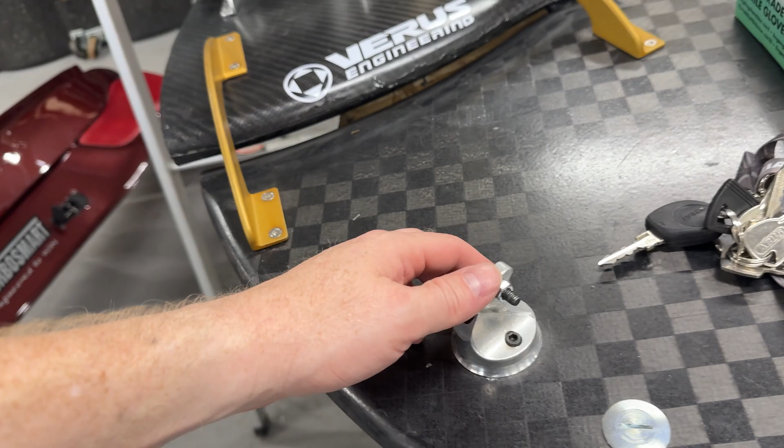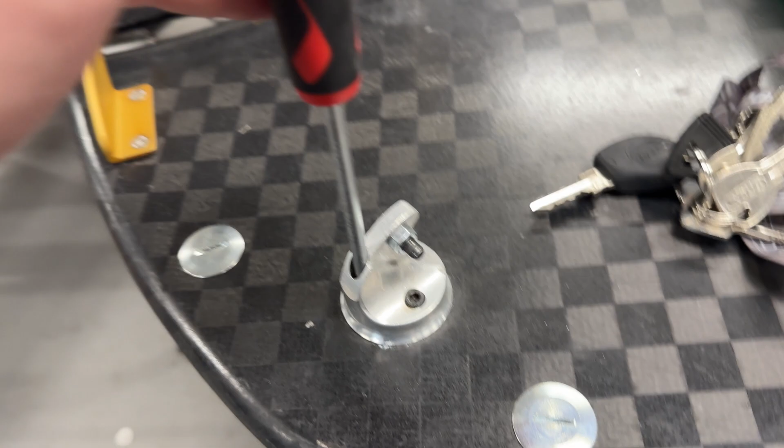And then I think also the issue is, not sure if it's visible, but if you move this one, the footprint of this unit isn't that big. I think it has a small receiver under here, which is not bigger than this diameter here. So this makes an issue, because then we literally have just this spot to support it. So whenever the load comes on this one, it tends to move like this. It's kind of difficult to show, but let me try again. So if we do this one, you can see that it moves quite a lot.

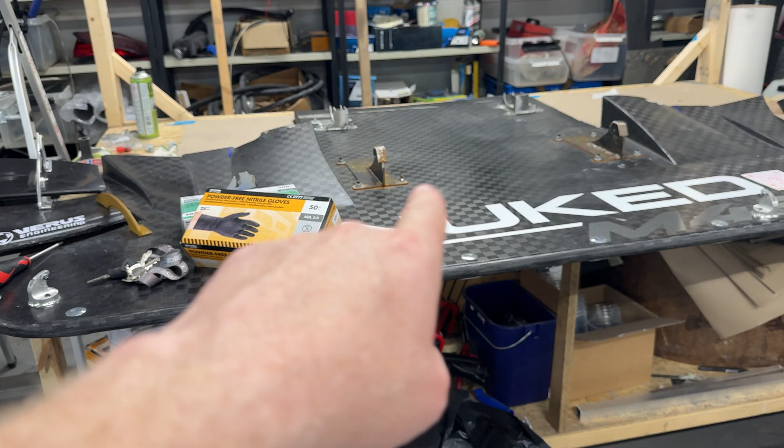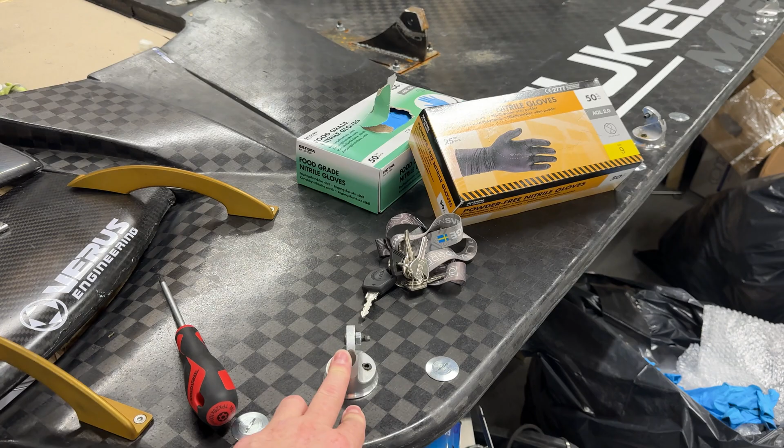So I think this might be one of the issues, but then I think this edge here is so far out from any points. Normally when people have splitters, they might have the mounting point somewhere here, but our overhang is so massive. And even from here, it's far away from any structural point. So I think what we will do, we cut the splitter open and then make a big plate inside here with supports. And then probably do something from these as well.

And then I saw that the second damage was that one of the wings here has completely separated. It has been pulled down, so it actually does its work. But these are still good. Verus made these, and these are really, really nice. But this one needs to be glued together. I think we will make new ones of these in the winter, but right now it will do. So that's the plan for that. And then let me show you the other issue.

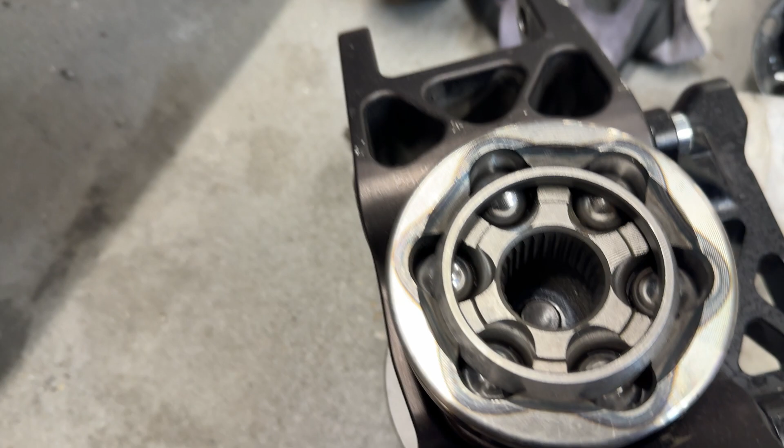So this bolt here is approximately 85 millimeters long from bottom to top. So this one is 85. I ordered new bolts, which I'm pretty sure are like 120 or 115 or 110 or something like that, but they are quite a bit longer than these. So I assembled this one now, and now you see that the thread of the bolt goes all the way through the spline shaft of the joint.

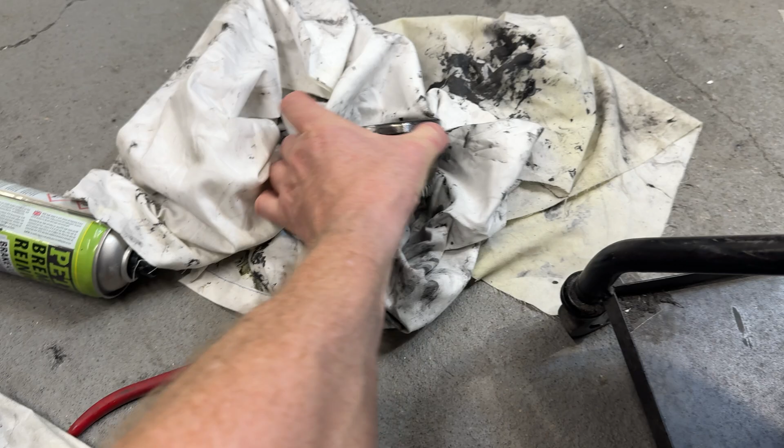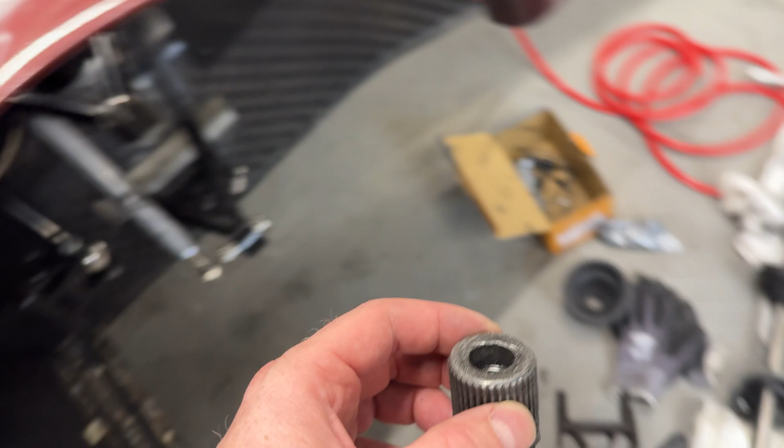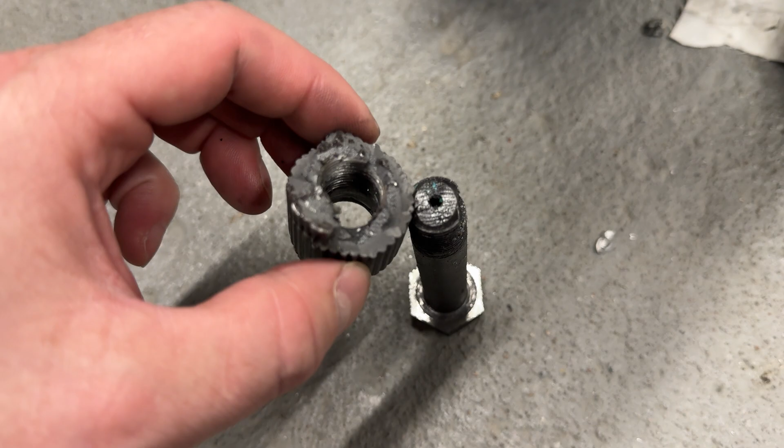So I think the issue behind this was that we had this one, dirty as hell, but you can kind of see this one. So this one actually broke here. And if you look at the other end, which I have somewhere here, this part here, when this bolt was sitting, it was literally just pointing out. So basically where it cracked, this was the top of the bolt. So to be honest, that might be the issue.

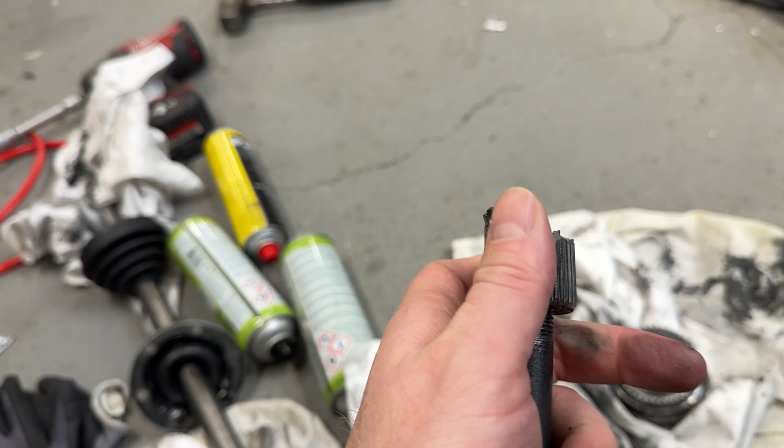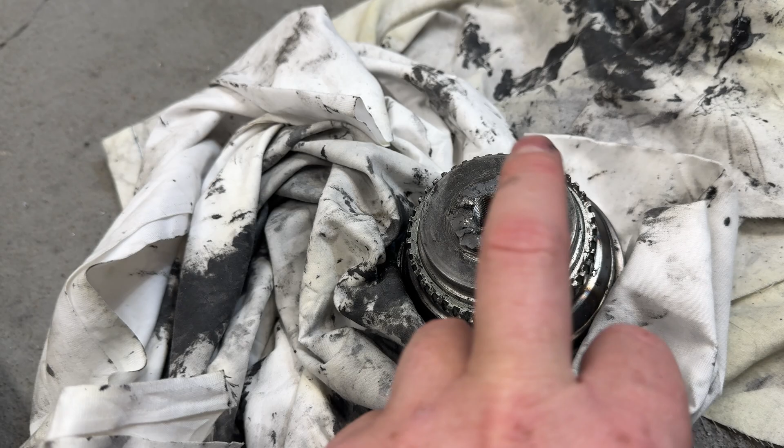The thread is quite damaged on this one, but in the end the bolt didn't go further than this. So that leaves the rest of the joint to just be a hollow pipe, and then there's not so much structural strength to this. So having a bolt all the way through, and you see here that there is at least like 20-25 mil of thread left, I think this part will be stronger. But that's my plan. But I also started to look at a different solution, which I believe would be good.

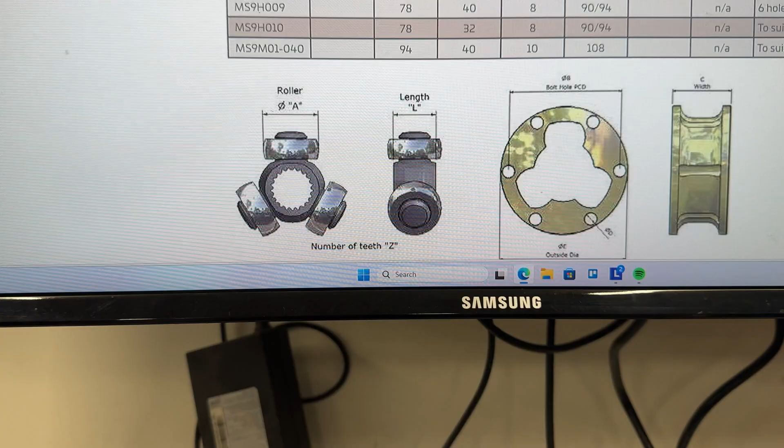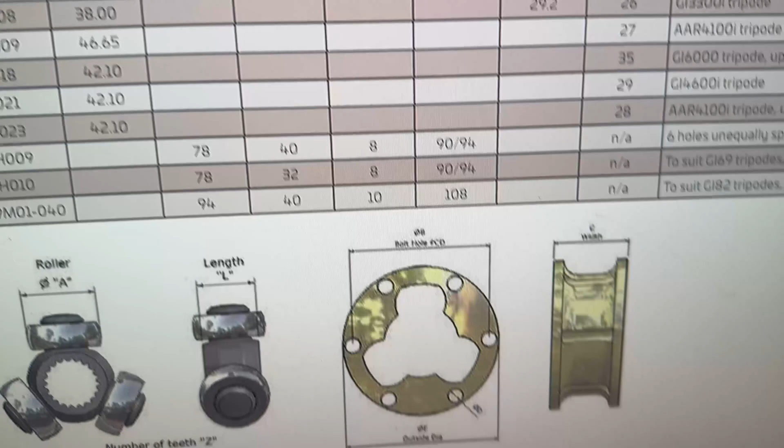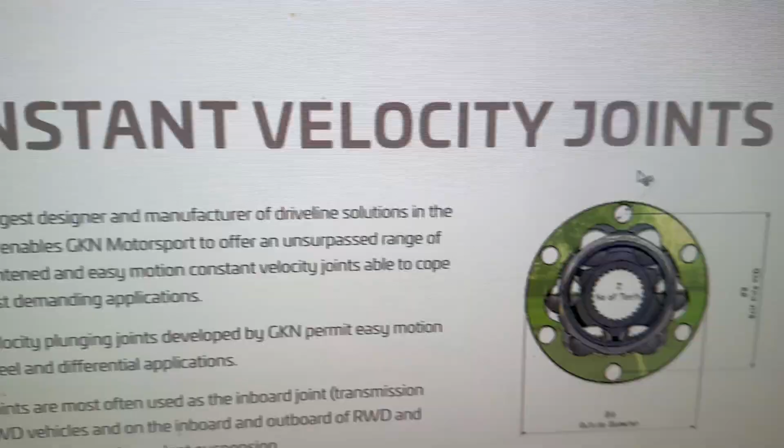So I started to look at putting a tripod on this one instead. That's my plan, at least. But what I need to figure out, and I'm not really sure, I'm actually talking to Matt at Roger Clark right now to see. I found a tripod here which actually has 27 splines. So the issue I have is that my drive shafts on the gearbox side have a normal GKN, like a Porsche 931. So it's a 108 mil bolt pattern on it.

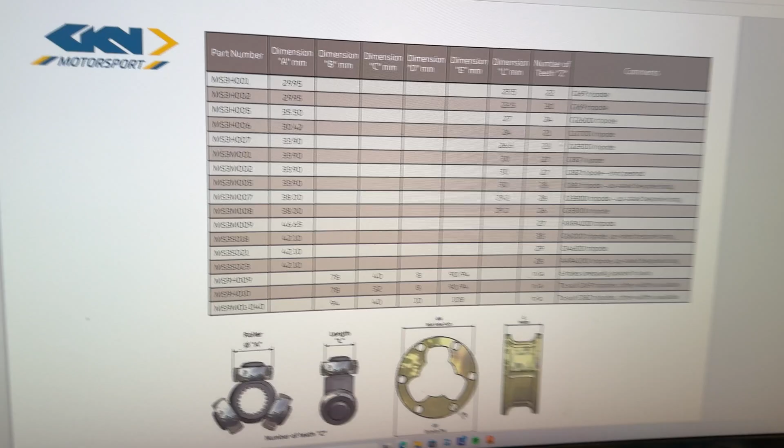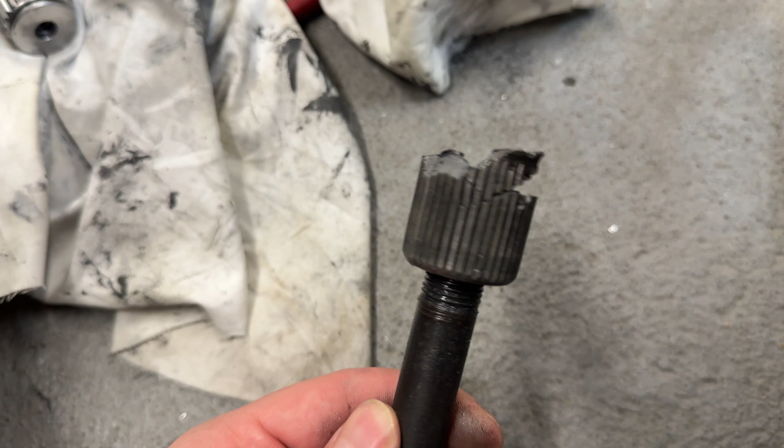But then on the other side at the wheel, I today have those that I showed you previously, the Audi S2 versions. The only issue I have with those is the male spline shaft. I think this end here is not that long. In the end, it's something like this, so it's not super long. Maybe that's not an issue, but we'll see. If we do the bolt through, it might be better.

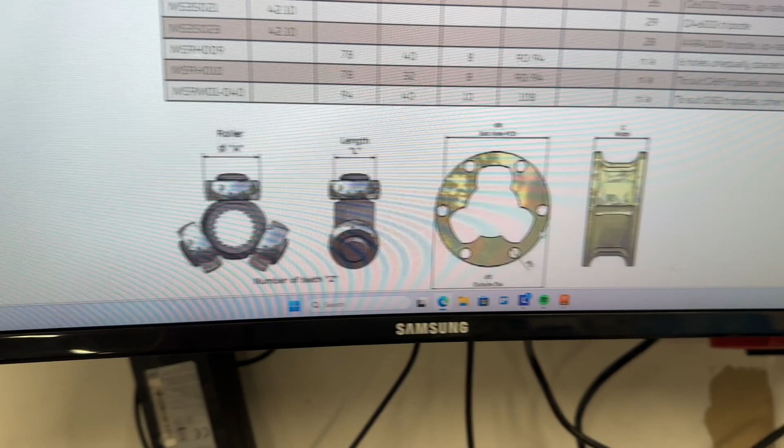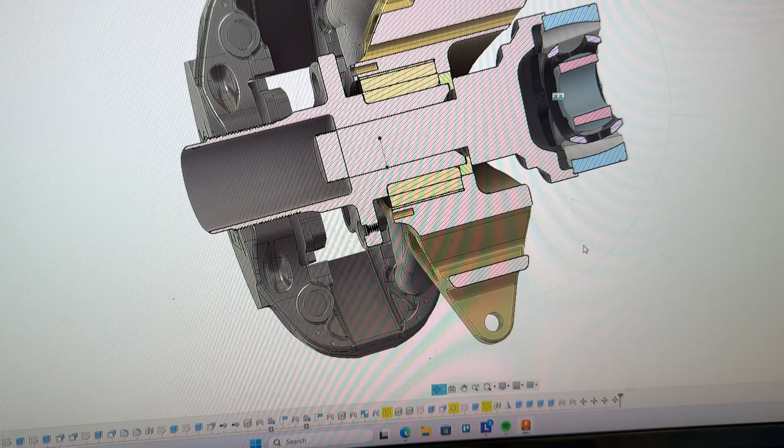However, if I would redo this, I would probably do something like this. I already did a sketch of this. So my idea here is that instead of having that joint going into the center stub, I will make an adapter, which would be this part here basically.

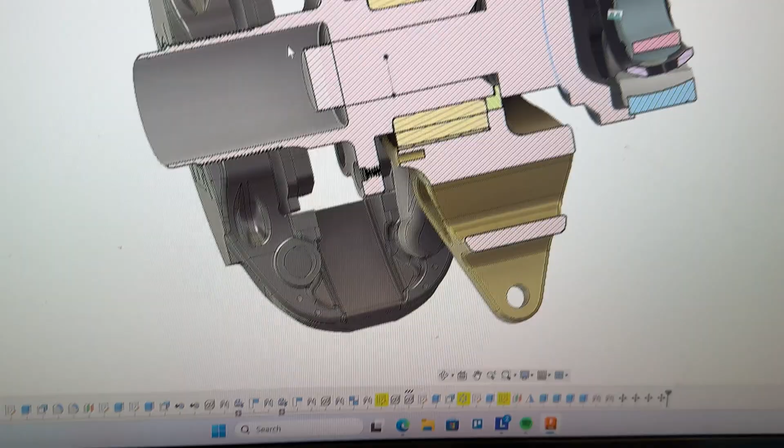Hard to see, but it's kind of this part going all the way here, and then instead of having this drilled and threaded, it will be a solid one with the splines according to the joint or to the stub that we have, and then from the outside here it would actually be a big locking nut on this thing, and then in the end, in the back here, we will do a flange type on this adapter.

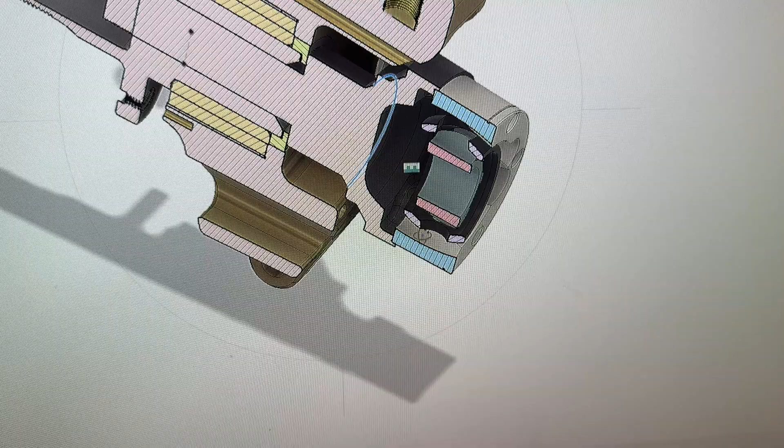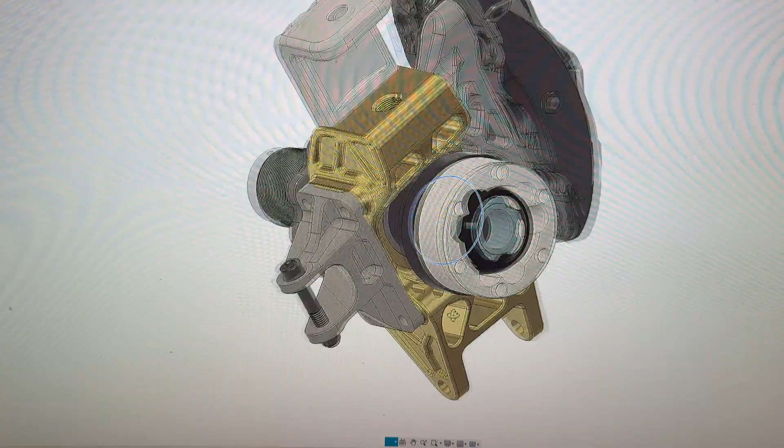And then do a CV joint or a tripod. Depends on if there are benefits going for tripods. I'm not really sure, I need to figure that out. But I know that for the Gobstopper, Matt told me that they are using tripods. I believe the tripods are better in an aspect where I guess they can move more in more angles. They don't really cause some sort of power loss. That's my assumption, but I could be wrong. But this is kind of plan B.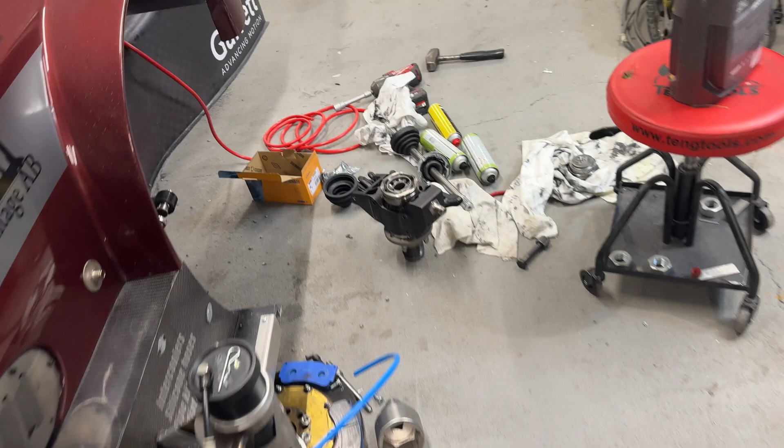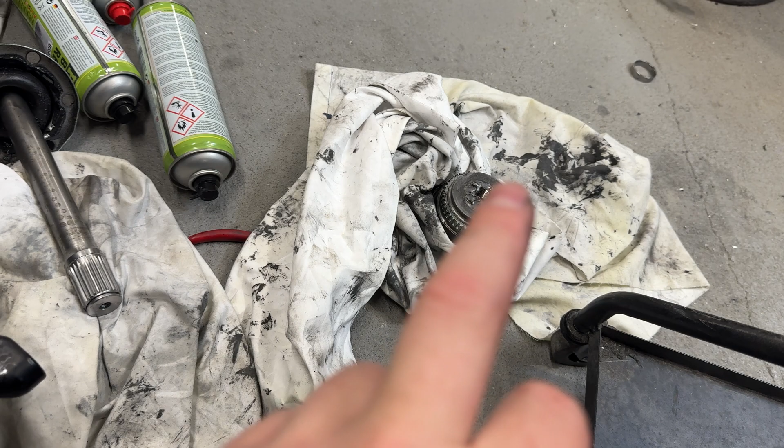But right now, plan A would be to fix, to get this together. So I have a new joint, I have a new bearing. The bearing in the upright was completely gone. And this is also the idea why I would like to rebuild this, because when we broke that thing off, there's actually nothing holding the bearing firm together anymore. So the only thing that was making sure that the stub wouldn't get out of the upright was actually the caliper and the disc. That was the only thing that was holding it.

If we would redo this with a fixed adapter in here and then a bolted CV, then even if this breaks or the drive shaft breaks, it will still have a firm wheel, where right now it didn't. And I didn't really go that quick, but imagine going 250 or something, and then that happens, because the wheel suddenly changed toe in and toe out and camber with tons of degrees. So the car was suddenly all over the place. So that is a little bit worrying for me. I think in the end, even if this works, I might redo it with the drawing that I showed. I think that will be better.

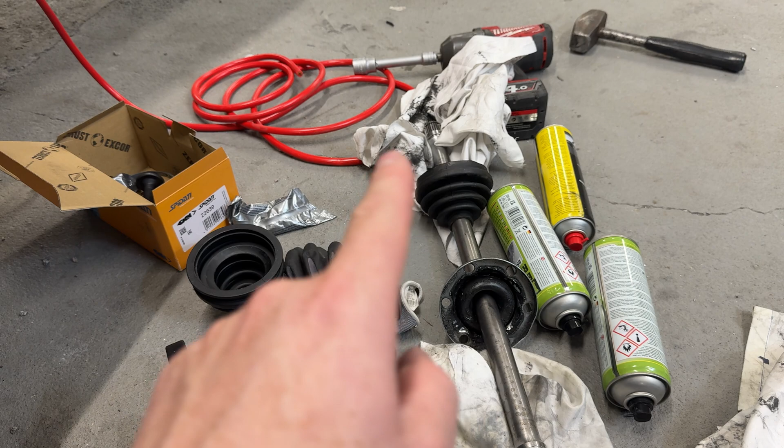And why I need to figure out: these are the Audi ones, and on the gearbox end we have the 930 GKN ones. So the issue is these splines are different than these splines. So I need to find a tripod or a CV that actually accommodates 27 splines. I've seen the tripods do have it, but they don't really write the diameter of the hole here. But maybe it's a standard. Maybe when it's 27 splines, it's actually a set diameter. So I need to figure that out.

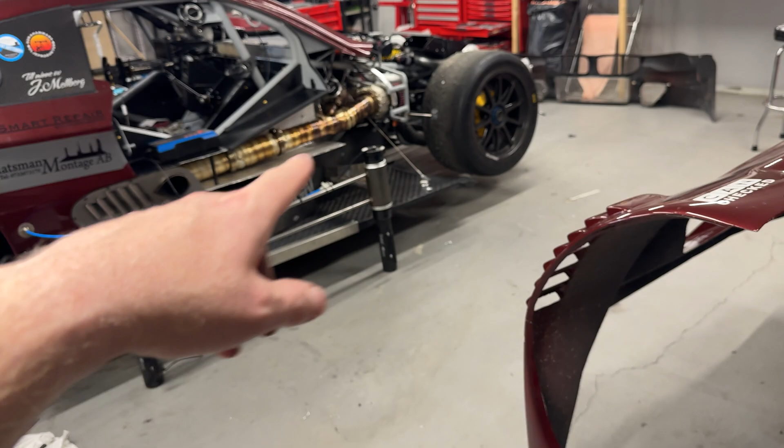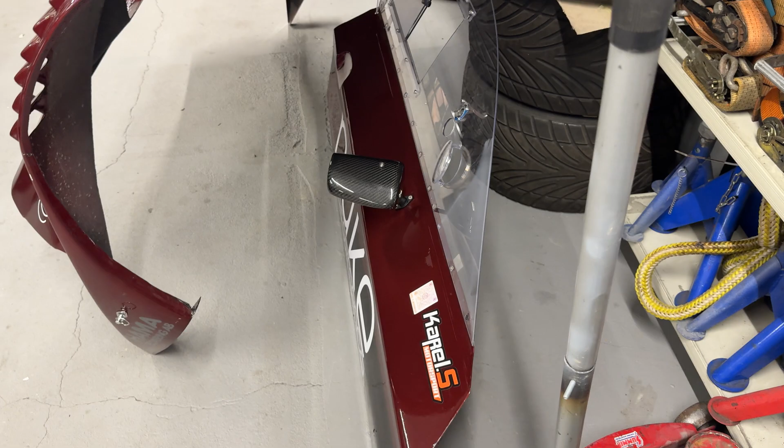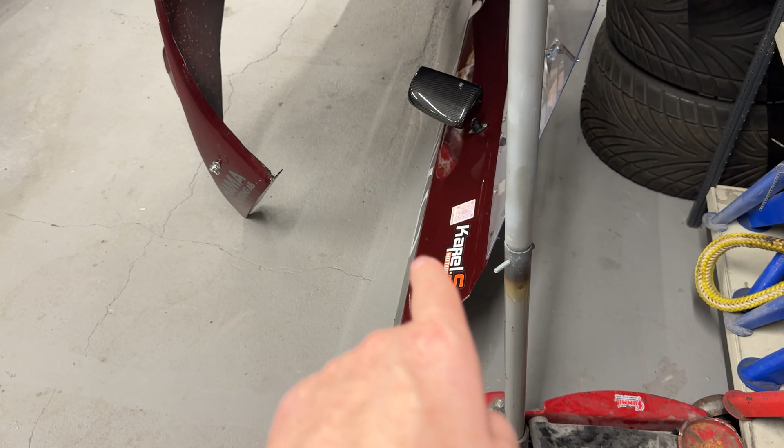But right now I will put this together. Ludde and a new guy are coming as well, so they will jump on the splitter so we can get that fixed. And then we have some small things we need to figure out. The doors. Because we have the exhaust going so close to the doors, even if we put some heat wrap on it, the doors tend to get really soft whenever they are heated. At that point when you open the door, the window basically almost falls in. It's that soft. So I think it will need to be a steel frame, which most cars have. And I'm thinking to do some sort of supports on the inside to make the door more rigid.

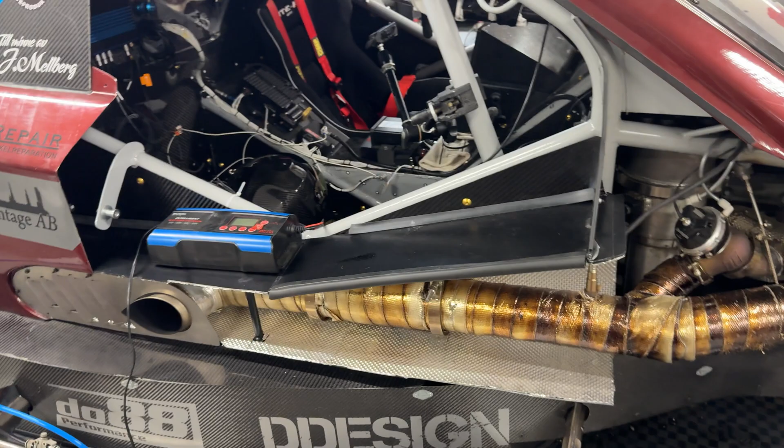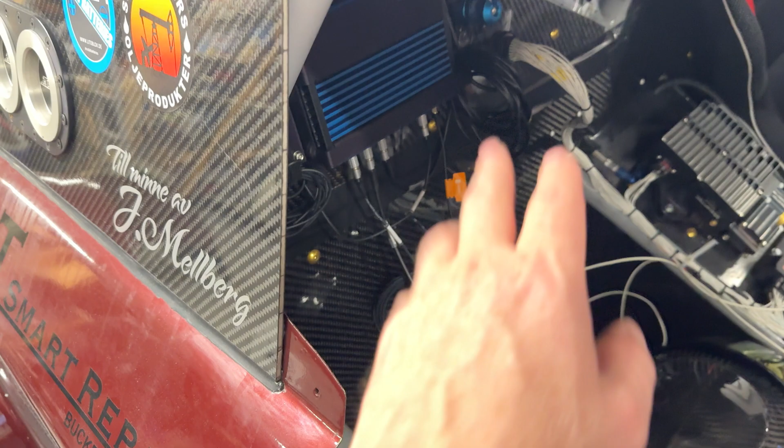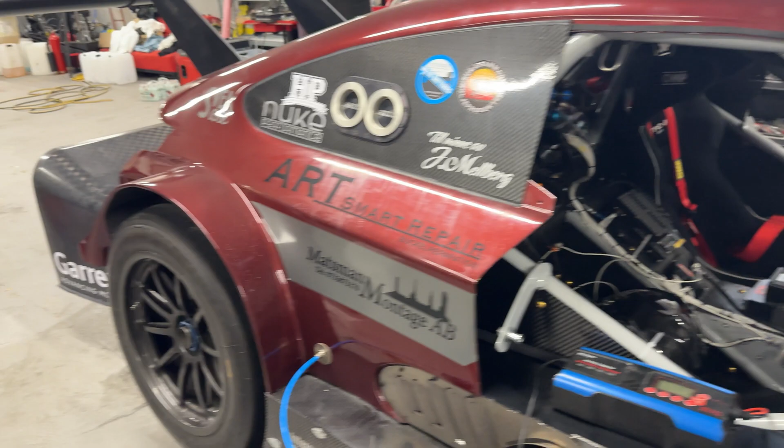And then I think the next plan would be to change a little bit of oil. Also we need to wire the V-box up better, because we literally got it the evening before we went. So I just put it there quickly with wires, and it doesn't look that good. So that will need to be addressed before the next test. And also bleeding the brakes. We had some issues with that, so we will need to do some bleeding of the brakes, and I hope the pedal will be better.

It might be that we will need to redo some of the piping for the brakes. Because today we have Teflon steel braided hoses from the master cylinders all the way back to the wheels. And potentially that actually gives a flex.

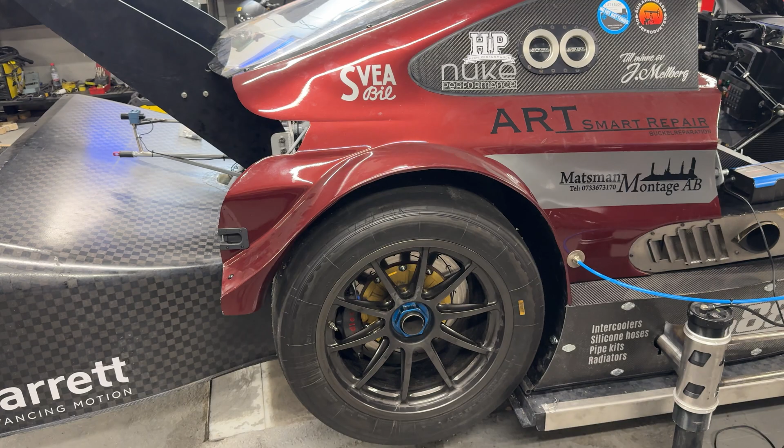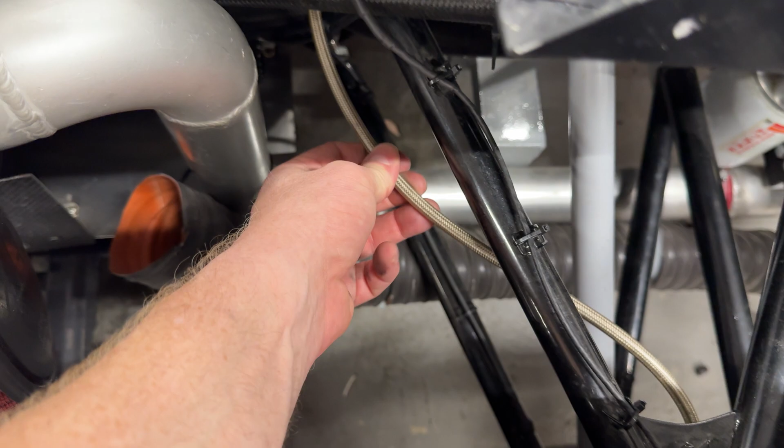But I think in the end these would need to be only the last bit. So maybe doing steel to here and then having a hose for this last bit only. I think maybe that needs to be changed as well. Other than that, we have some small issues with the water cooler and bits and pieces. But right now the wheel and the splitter are the things that need to be done. So let's see how it goes.

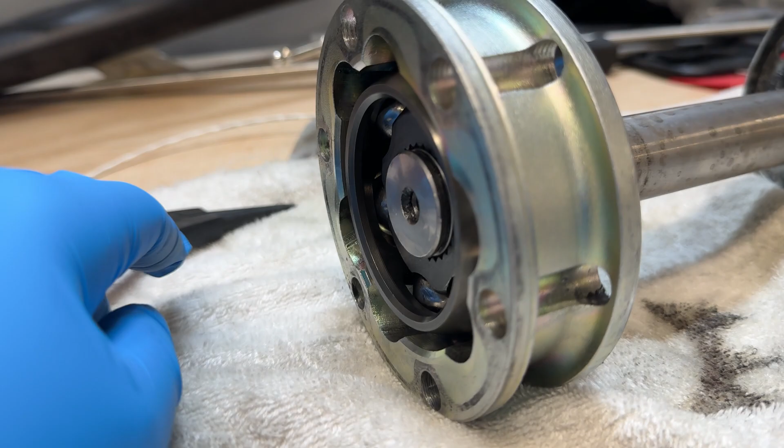Also, why I'm considering tripods is that a tripod wouldn't actually do this. If you don't have the covering rubber on it, this one is moving freely. So whenever you try to install it and this goes out of angle and one of these balls pops out, as they want to do now, then you're screwed. So yeah, let's see if we can do tripods.